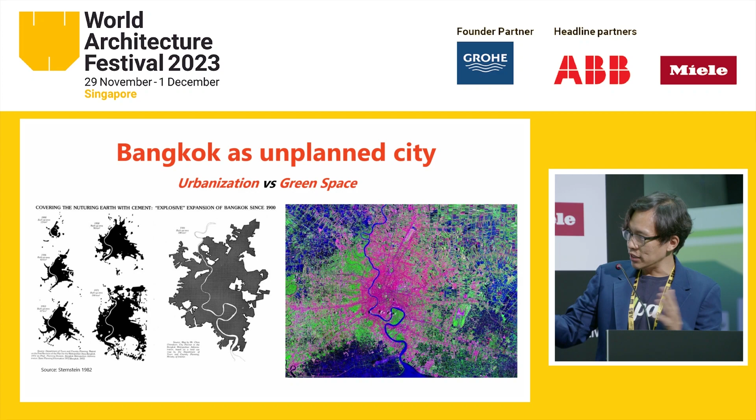Bangkok is one of the cities facing that problem, because the more the city grows, the more green space gets diminished. You can see that the city is unplanned and keeps growing.

This is becoming a city challenge in order to find land, and we are quite lacking in terms of the resources needed to implement parks.

But of course, we don't want the park to just be about putting in trees. We want quality parks as well, and they need to be accessible within walking distance.

What we found out is that even though the city is well developed, there's still a lot of abandoned area left in the city.

There are so many different typologies, from under the expressway, along the canal, along the footpath, or even along the railway.

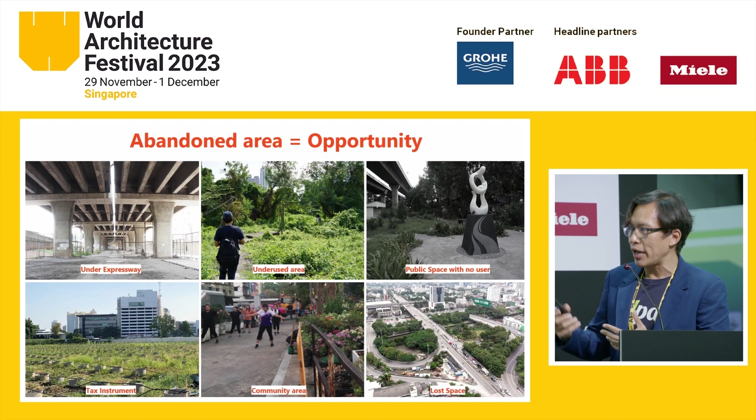This is a city opportunity to use this abandoned area to turn the grey, unplanned city into a more sustainable and greener city. Our approach is about small intervention creating bigger impact.

After working in Thailand for so many years, we realized that developing big interventions requires a lot of big investment and coordination with multi-stakeholders, which takes time to develop, and we can't wait because the problem is so big nowadays.

This approach requires four characteristics. Firstly, it's about infiltration, because it can be easily accessed within walking distance among communities, and the communities themselves can customize the program for each abandoned area.

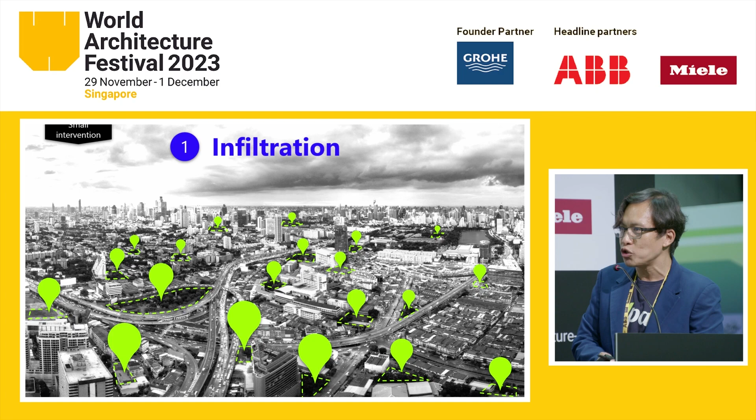Second, it's easier and quicker to implement compared to bigger interventions. Third, since it's less complicated, it can be scalable. Lastly, to create much bigger impact, it needs to be linked as one system and work together. So we established this platform called We!Park.

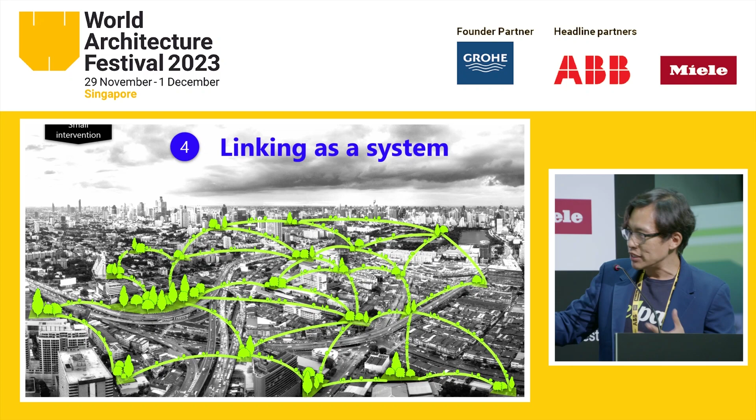It's a platform that connects stakeholders and resources in order to transform abandoned areas in the city into green infrastructure and parks within walking distance.

There are two important strategies in what we did. The first is about connecting multi-stakeholders, and each one of them has resources, whether it's land, funding, know-how, or even volunteers.

Everyone can co-invest in transforming this. I think this is the opportunity if we can bring all the resources together.

In order to do that, we need to empower people with simple tools, starting from an application that lets everyone easily identify available land in their neighborhood. We have data to analyze which land is more of a priority to develop further.

We have a guidebook to empower basic know-how for doing the park, and of course capacity building across various stakeholders, from the youth to city governments, to the private sector, and to the community.

We designed the process to make sure all stakeholders have a certain role throughout, from finding the land, to co-designing the program and the place, to co-investing.

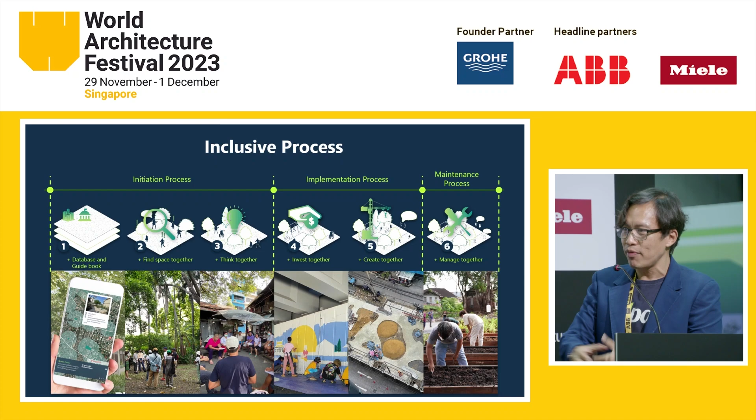That includes crowdfunding and co-management after the project is completed. As I mentioned earlier, we can't just put trees in an abandoned area—it needs to be green infrastructure too.

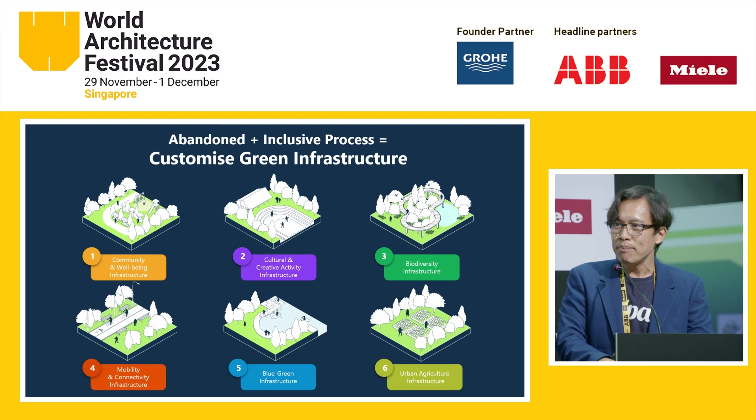It can focus on the community, or be blue-green infrastructure to mitigate flooding, or increase urban biodiversity, improve connectivity in the urban area, or even become an urban farm for the community.

We started with 5 pilot projects in the first year, and after 3 years we've been able to scale up to 24 of them this year.

Next year, by working closely with local government, we would be able to expand to another 100 more. I would like to show you some of the projects we already finished.

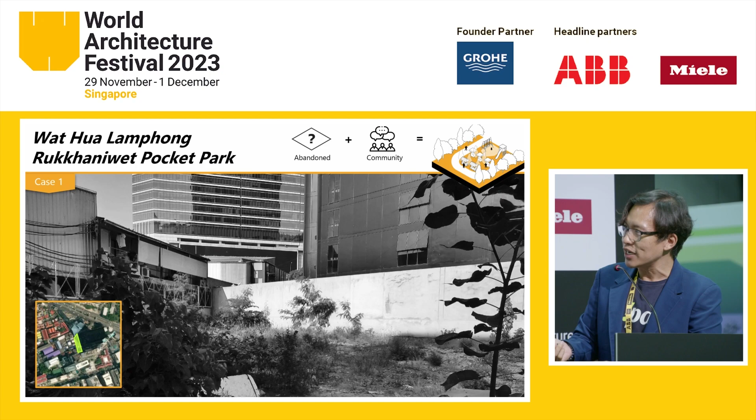The first one is a small plot of land within the city center, and we used this process to organize and engage students and the community.

We came up with a pop-up park and did crowdsourcing and crowdfunding together with government funding, and were able to complete the first pocket park using this platform.

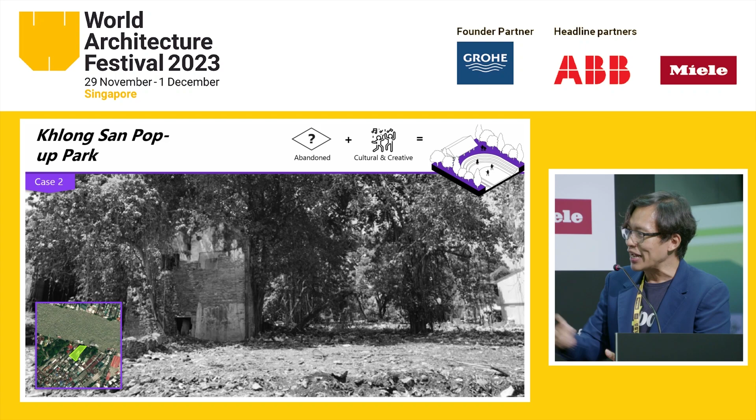It's proven that it can combine with many functions in the area, from the youth function, multi-spaces and playground. The second one is right next to the river, within the cultural community. And as you can see, that is full of garbage.

So what we did is ask all the stakeholders and community to clean up the land. Then we slowly used pop-up parks as a strategy to show the possibilities of how the abandoned land can be developed, progressively, phase by phase. So the community can start to use the abandoned land right away. We don't need to wait for the city budget.

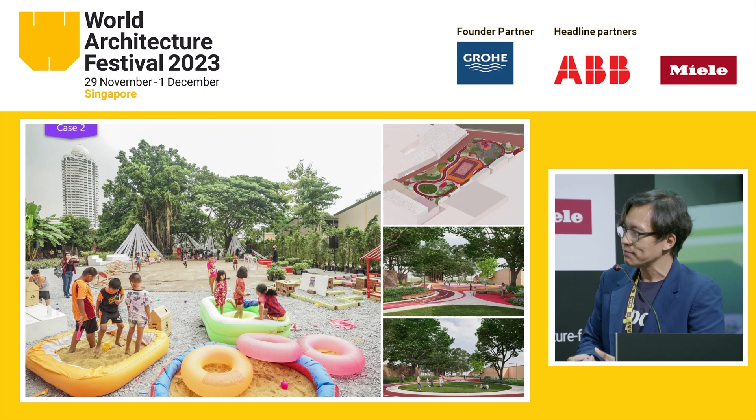The third one is more about biodiversity, because they have a lot of existing trees. What we did is organize youth activities to collect data about the ecology found in the area. We further developed that data with the community as a park focusing on preservation and biodiversity.

Another type is about improving connectivity along the canal. We have this kind of typical place where people don't want to walk because it's unsafe along the canal. So we organized a workshop connecting young designers to come up with pop-up parks along the canal.

So people feel safe and want to walk from one point to another. It becomes like a permanent structure in some locations, making it more vibrant, and people in the community can utilize the place.

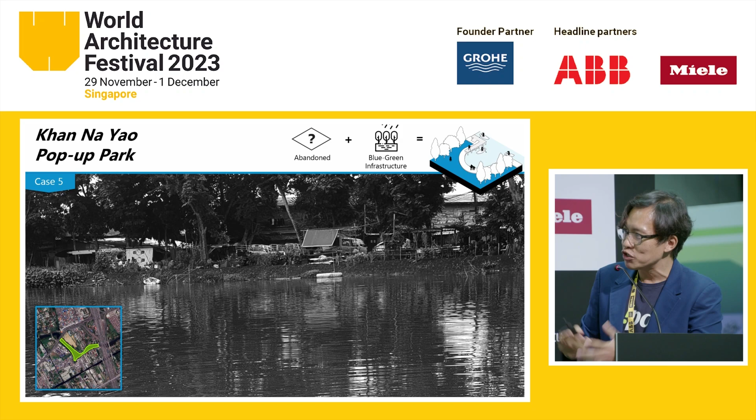Another type is about places that connect people back to the canal, because we have a lot of canals in Bangkok, but we never use them. So with this park, we've opened up the possibility to show the community that they can utilize the park for recreation, and also generate more economic value for the community.

Another type focuses on the urban farm, where we connect expertise to teach the community how they can utilize it for an eatable garden.

To conclude, all along we believed that making a park is the authorities' job and responsibility. But by opening up this kind of platform, we've opened up many models showing that abandoned land can become a park and green infrastructure in many ways, by combining private sector funding, progressive development, or even business models to make sure the park can be more sustained in the future.

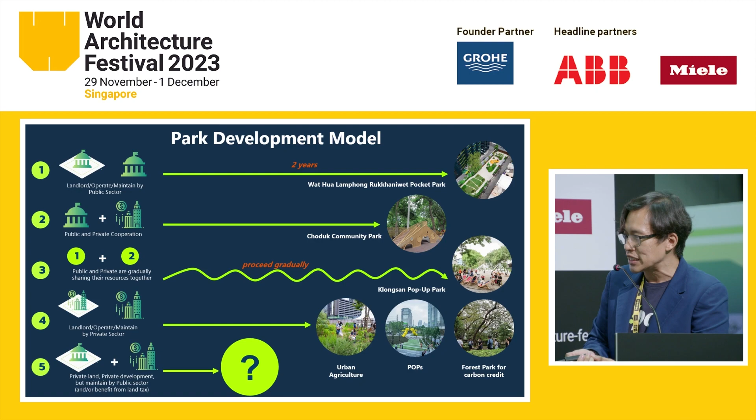And of course, it has unlocked city potential by turning abandoned land into parks in various locations and many possibilities.

What we try to do is decentralization, because all along we believed that resources and ability are all up to the government. But by decentralizing the know-how and the data, I think everyone can be part of this process and be the driving force in developing the park.

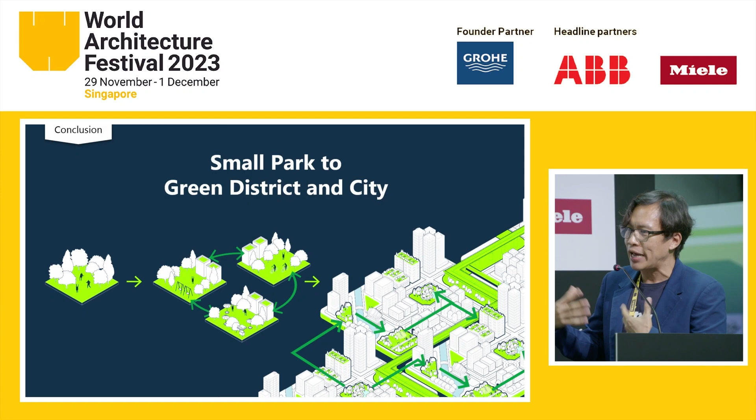From one small intervention in the community, we can connect and scale it. So we can slowly turn the gray city or unplanned city into a greener one in the near future.

I think the key is empowering people to be part of this process, to empower the city, because without the people, we cannot do it. We believe we all have the resources, the ability, and the power to do so. So this is what we did as WePark.

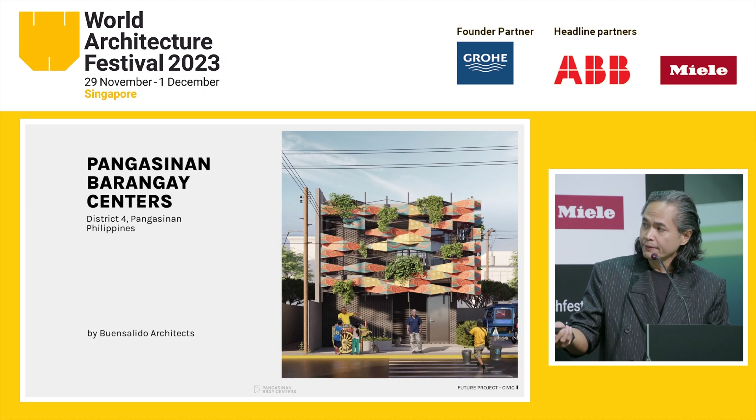We're about 30 in the firm, but I begin by saying that this project is a product of not two, not 30, but 607 creatives. And to better understand the scale of this collaboration, we start with this word right here: barangay.

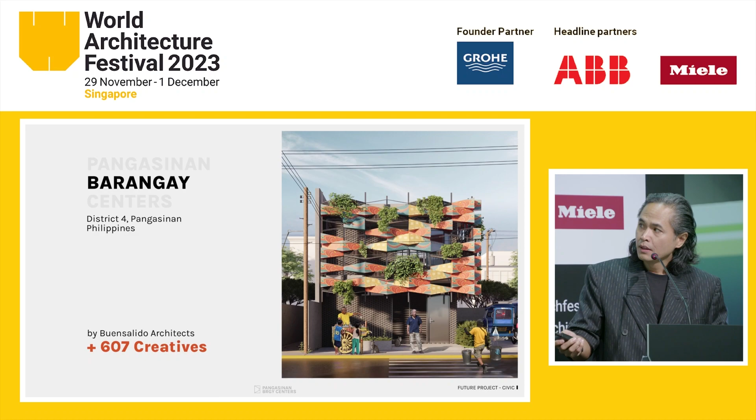Comparable to a village, the barangay is the smallest political unit in the Philippines and serves as the fundamental base of our national government. Today, there are more than 42,000 barangays in our 7,600 islands, each with its own elected officials and functions, a decentralized system that works because of the country's geography.

Pangasinan is a province four hours north of Metro Manila, and its 4th district consists of five municipalities, sharing between them 140 barangays.

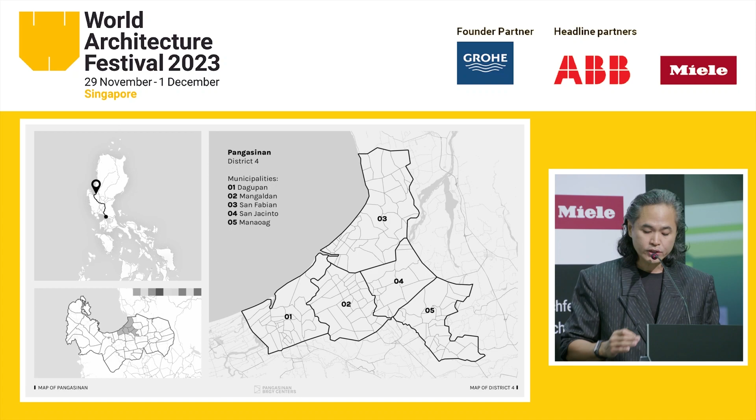The brief was for us to standardize all 140 barangay centers, which usually come as 2 or 3 stories or else as a multipurpose court, whose main function is to be the core facility where government services are delivered to the immediate community, from food and health to other essential needs.

Its promise is to be a bridge between the government and the people, uplifting lives through dignified social services, empowering people to participate in the decision-making process, and engaging the community through a social space that they can identify with.

But despite the intent to decentralize power, a centralized authority is still felt with the current design of barangay centers, with the national government prioritizing speed, control, and cost, sacrificing the quality of these spaces. Centers are designed to be purely transactional, often devoid of identity, culture, and even basic human comfort. The result is that people are alienated from these structures.

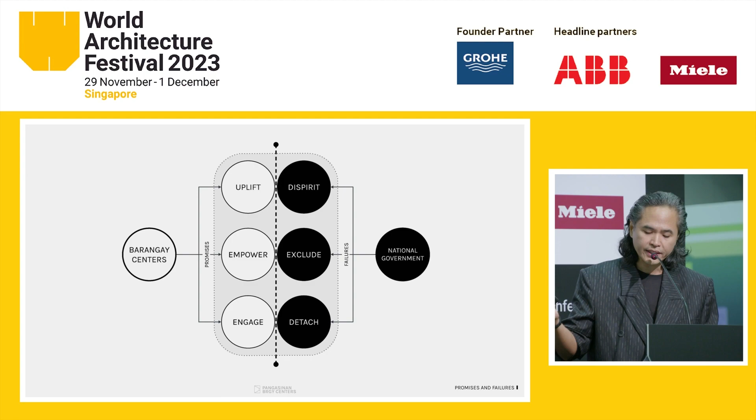They are dispirited because of the quality of these centers. They feel excluded as their centers fail to reflect the local context, and citizens are detached, unable to create shared memories and meanings about the place due to the lack of social spaces.

Now, Pangasinan's congressman recognized these failures and challenged us to find a way to standardize the design while still maintaining the character of each and every location.

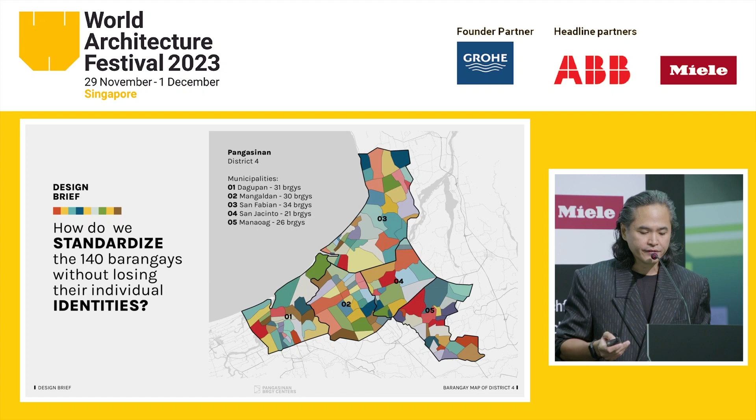There was a catch, however. We were asked not to change the plans as these were already pre-approved by multiple authorities. And we were also asked to continue using low-tech conventional construction techniques to secure cost and buildability.

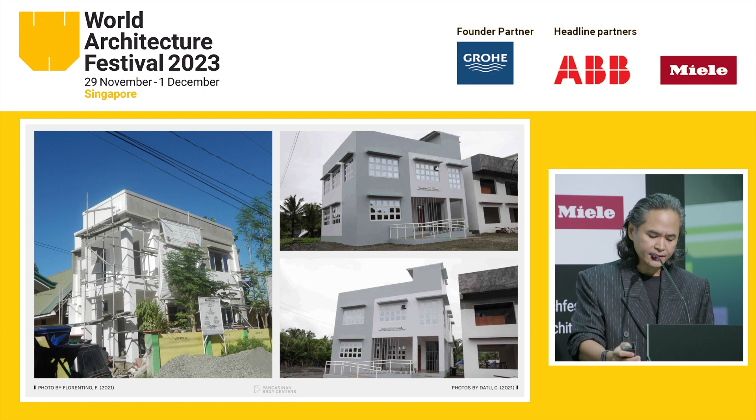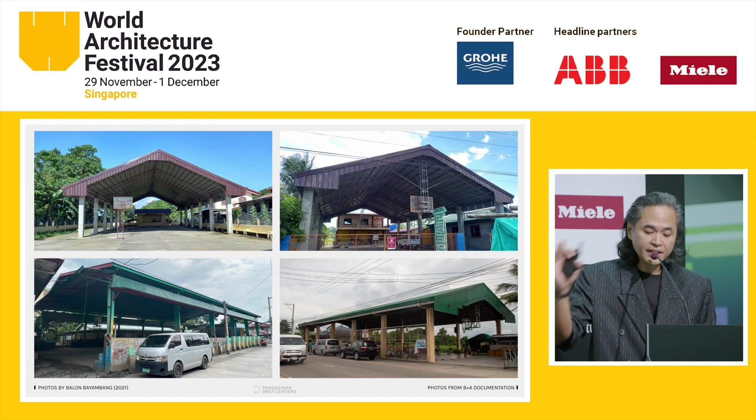They also asked us to focus on the exterior as a small first step to attract citizens towards the centers beyond mere transactions, and as part of a larger and more drastic improvement to the design over the coming years—all while working within the same budget allocated for the current design.

So as we reflected on these challenges, we came to realize that these buildings are just like the people they serve. People have common values, yet we keep our own individual identities intact. And like people, buildings also have bones, a body, and a skin.

Bones provide support like a building's structural frame. The body is our exterior shell like the walls, while the skin, along with our clothing, provides our outermost identity and protects us from the elements like a building's outer screen.

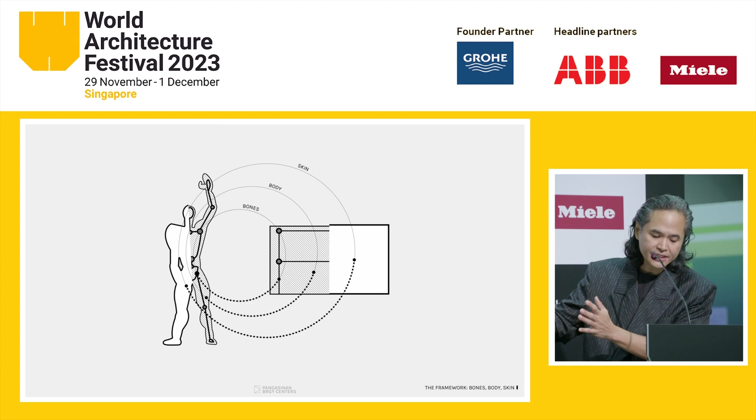This framing of the problem helped us determine that while the bones and the body could be optimized for standardization, the skin could be reimagined for localization.

So starting with the standardization, we decided to retain the post and lintel construction for the bones, but optimize the heights and roof slopes to lower the costs.

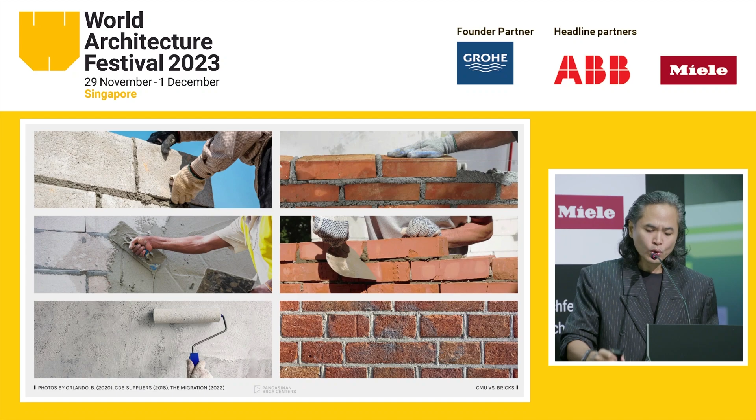For the body, CMUs are still the standard in the country despite its inefficiencies. So while we were asked not to touch the body, we still shifted the material to brick, as brick is just as low-tech, but is more sustainable with thermal insulation that fits our climate better.

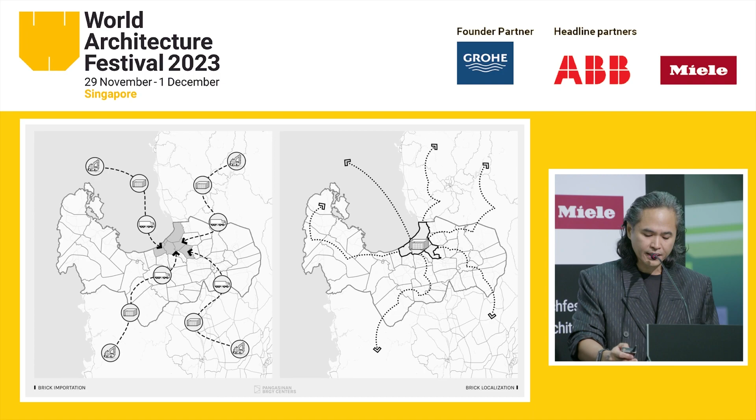Part of our proposal is to actually revive the local brick industry, not only to cut importation, but to also supply other projects in Pangasinan. Design-wise, its curved undulating form alludes to the ocean surrounding this coastal district.

Now, having established standardization through the bones and the body, we shift our focus to the skin next as we localize the building's character to respond to and reflect its eventual context.

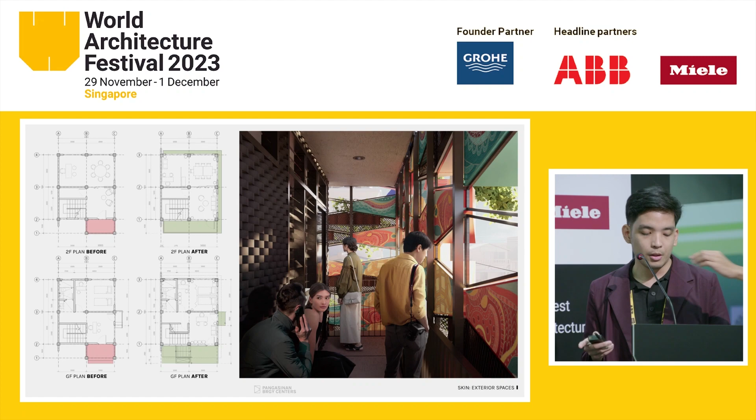So as a first step to localize the skin, we added features towards better thermal comfort, since the previous design lacked responsiveness to the tropical climate. We introduced canopies for shading and widened them to create wraparound balconies as social spaces. This resulted in a larger and more usable welcome porch underneath.

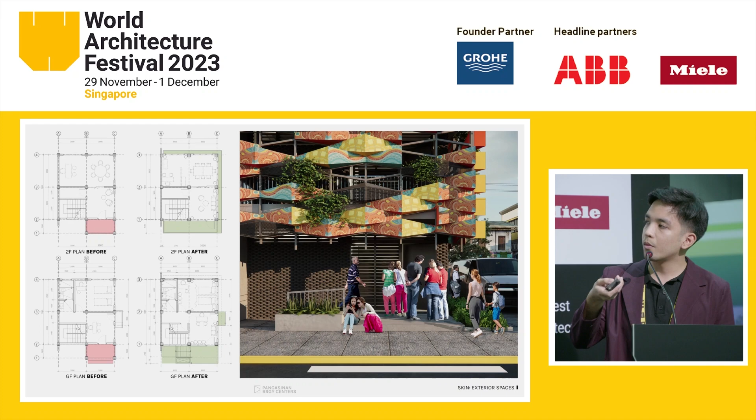We also converted the openings to jalousies to let in as much air as possible. The windows and doors were all made into modules to improve costs and speed of fabrication. The skin is then introduced around the balconies as a brise-soleil, which further protects the interiors from the harsh sun, regardless of the orientation of the site where it would be built.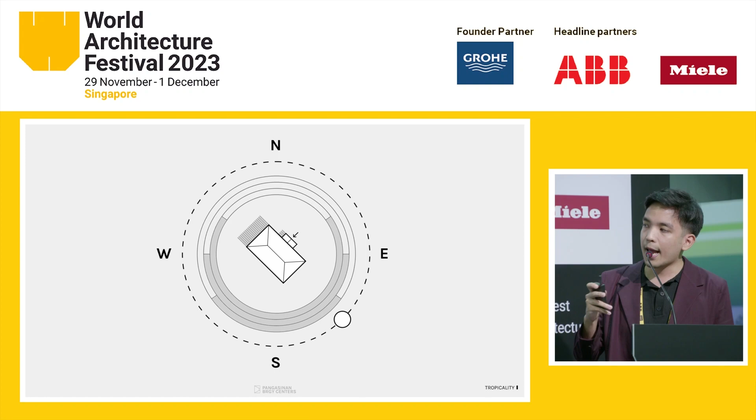So this lack of a specific site presents another concern: how will the standard skin reflect the character of each barangay? And for that, we turn to the bigger picture of Pangasinan.

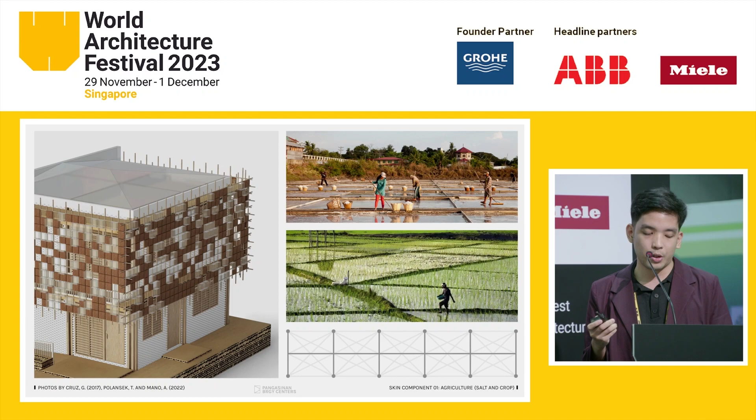Pangasinan is known for various industries where we tried to draw inspiration from. They have a rich agriculture industry where we studied crop arrangements, a traditional weaving industry where we studied the patterns and even their techniques. Combining the logic from all those, we were able to derive this diamond net-like grid, which is a nod to their massive fishing industry born from having the longest coastline in the country.

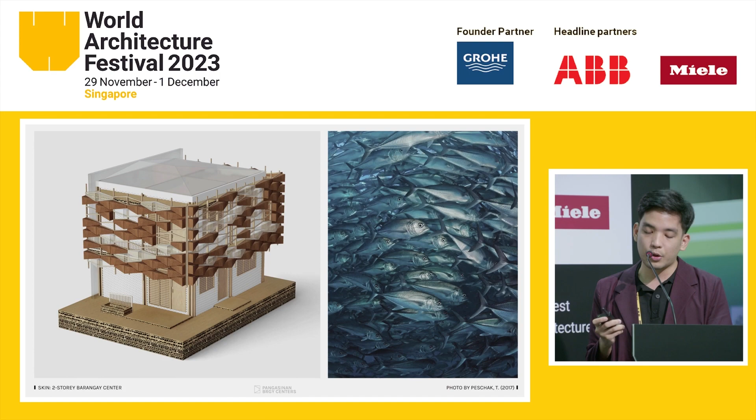We developed this into a 3D network of modular panels that resembles a school of fish, an observation quickly made by the locals. Now, as you may notice, the facade is part solid to block heat and part porous for daylighting.

On the solid part, we borrowed from the patterns of the local weaving industry, discovering a 30-20-10 tonality ratio across the patterns, which we applied to the shading of the panels. We then combined this with the symbolic colors of each municipality to establish both distinction and familiarity.

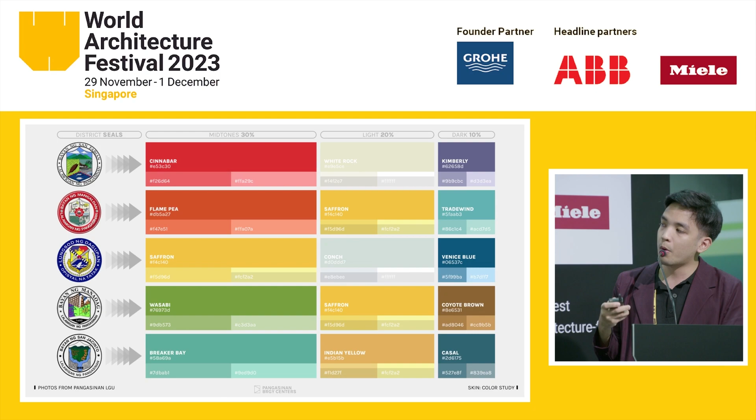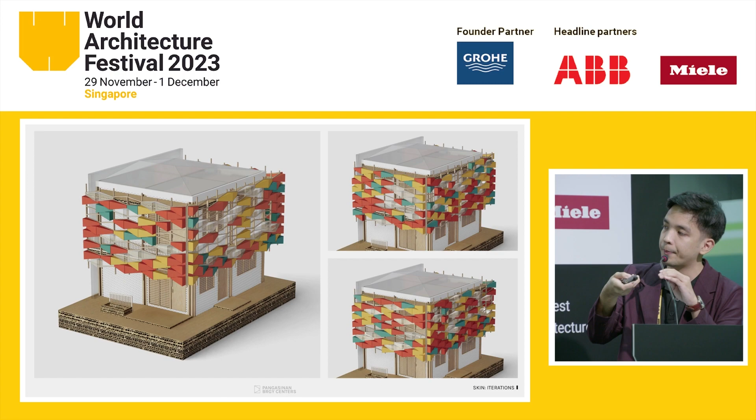To further reinforce this distinction, the skin is envisioned to be arranged differently per barangay. With a parametric approach and consideration for daylighting, we developed hundreds of unique arrangements for each barangay and structure, akin to how our faces, colors, and clothes make us all unique.

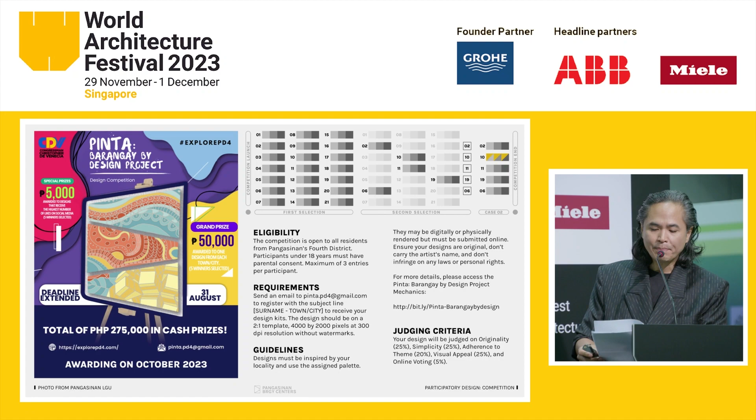The design of the panels will be crowdsourced through local art competitions, where the top 3 patterns will be awarded: one for the light, one for the mid, and one for the dark panels. The competition was launched last August, and here are some of the entries.

Here are some of our own internal pattern studies, which we used to visualize the barangay centers in Mangaldan, Dagupan, and Manaoag, with the skins donning their specific municipality colors.

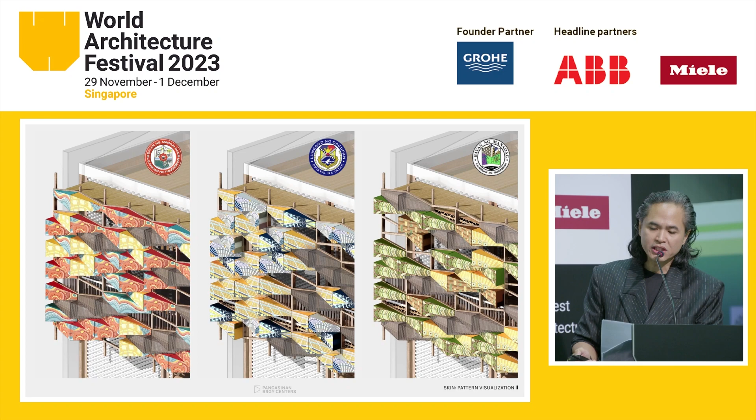We simulated the participatory process by creating a physical model. As mentioned, the panels are modular, fabricated off-site, and shipped to the community, where the residents of the barangay themselves can volunteer to help paint the winning patterns on the panels.

The result is a building that is inspired by, designed by, and crafted by the local community, which hopefully creates a high sense of care and ownership towards these barangay centers.

The vision is that each barangay, with their own communities, can independently implement this standardized design on their own, without even needing us, the initial designers.

This, unfortunately, opens up the project to issues of quality. For that reason, we authored a design manual that covers everything a barangay would need to deliver the project, from concepts to Gantt charts, a detailed kit of standardized parts, among other things. It's a living document that can be improved over time. Some barangays have actually started constructing their own centers independently using the standardized manual.

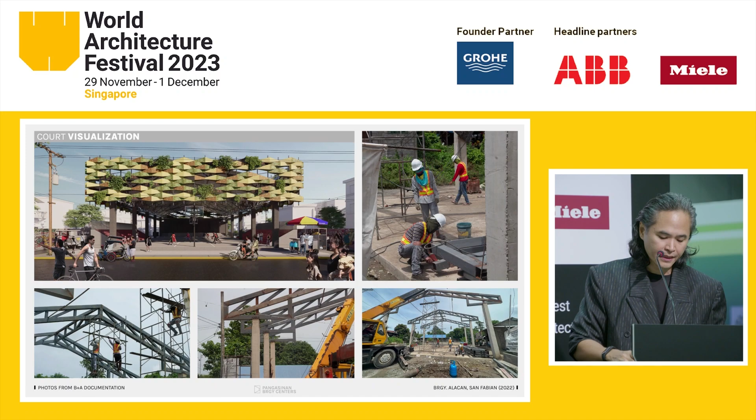This is the multipurpose court in San Fabian and the 2-story center in Mangaldan. We're very excited to see about 20 completed buildings by the end of the year, and 20 more every year after.

So to close, our aim was to balance standardization with localization. The standardized bones and body address buildability, cost, and speed of delivery, while the localized skin solves tropicality and identity.

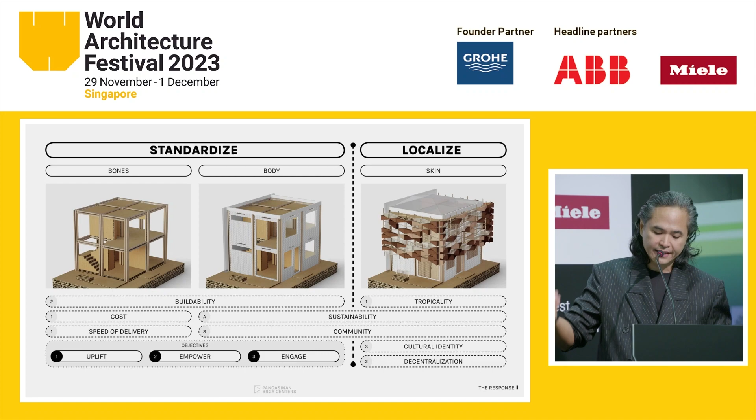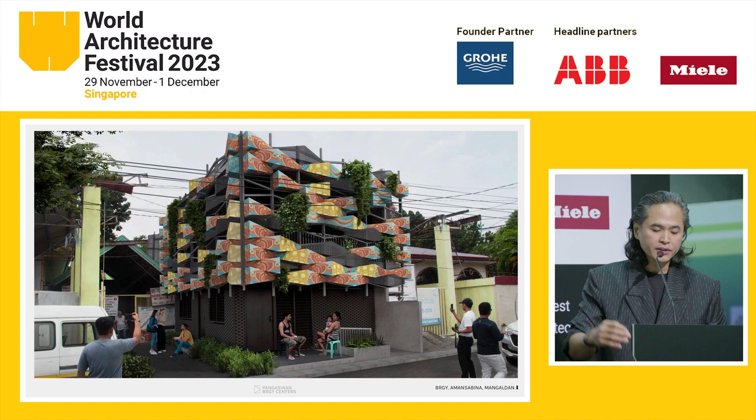The hope is that what was formerly a mere transactional experience be transformed into a social space that encourages meaningful connections, resulting in an uplifting, dignified experience.

By conceiving spaces that can be influenced by, designed by, and even crafted by the people, we create an empowered community, reviving engagement towards barangay centers as people start to see them as a reflection of their collective visions and values. We're very optimistic that the project, no matter how small, can cause a ripple effect towards a more engaged citizenry, especially if applied successfully to all 140 barangays, or even across 42,000.

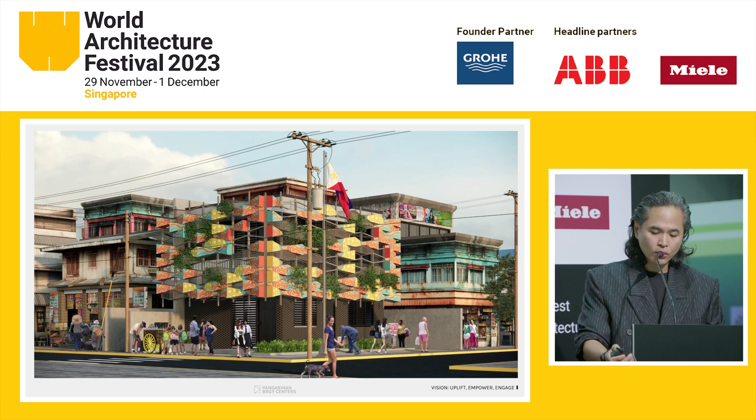Hi, sorry, do you hear me? Yes. I really feel very privileged to be amongst these projects.

Today, although we usually focus on public space, I am going to present a project that is not about public space, but how to activate third cities, with a prototype in the US in a small town.

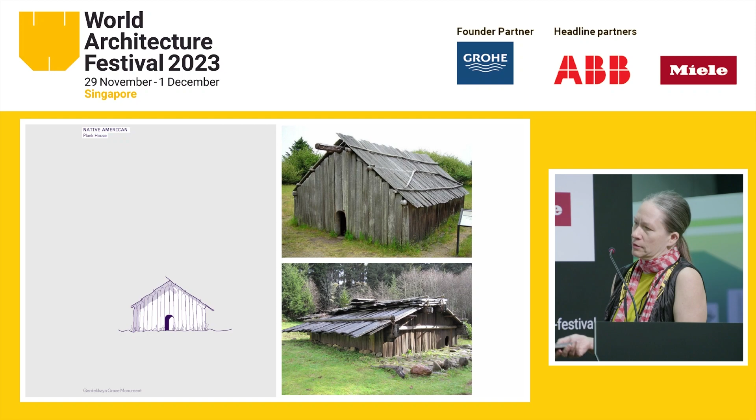So rich that the land has been settled over thousands of years. It had a very rich Native American culture, who in this particular part of the Willamette Valley built longhouses. About 200 or 300 years ago, many settlers came to farm this very lush land, and with it they also brought their own built culture, with silos and barns and their own expression.

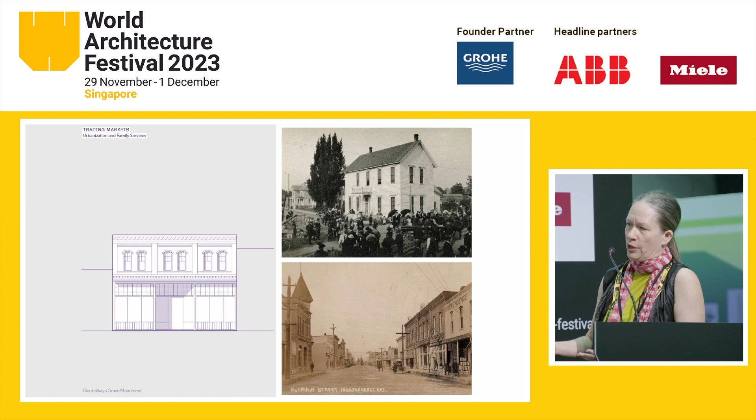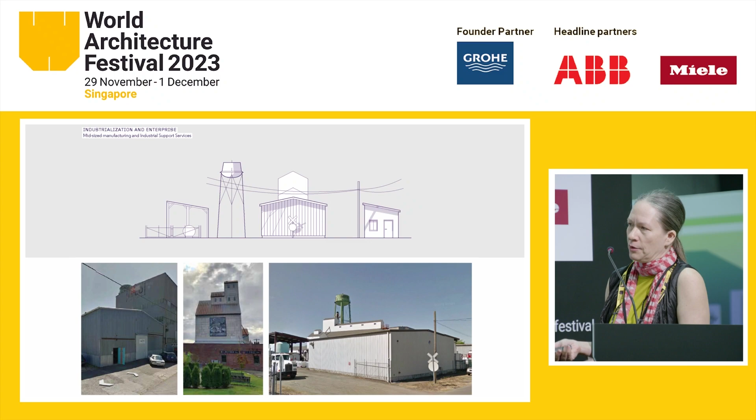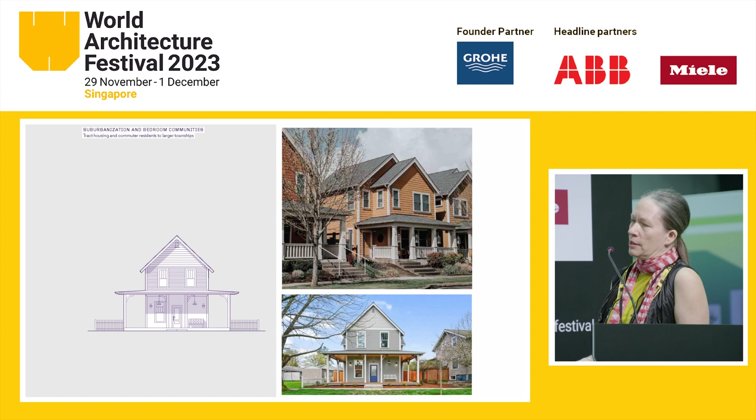With that came wealth and an architectural expression mimicking the Victorian, called the gingerbread style, but in a more rural context. This was followed by another phase of economic development—mid-sized manufacturing that took advantage of entrenched agriculture but advanced into industrialized practices with electricity and other things, which put in place hospital infrastructure and universities.

Modernization resulted in what we're all familiar with: the suburban home, the single-family residence, which is growing and growing. What we found is that the single-family residence, because of its land greed, actually diluted public life and economic access—a prolific problem many countries face, not just affordable housing, but accession for new generations.

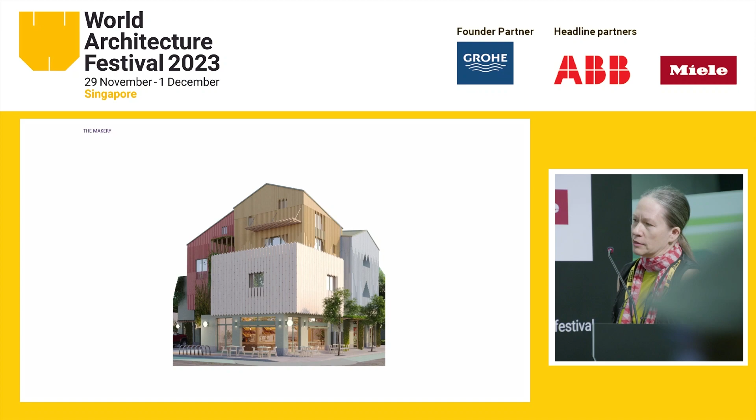So our idea was to build on this dream, over many generations, of access to micro enterprise or self-determination to open shops alongside the single-family residence. We came up with this concept of the makery, built on a model thousands of years old: the shop at the bottom and living above.

We call this a foundation to stand on, and it introduces a new economic model. One of the problems with the single-family residence is that because of modernized zoning, most residential land becomes inaccessible to business, and this creates a fragmentation of families who have to work remotely.

Somebody will be a nurse, somebody an educator, somebody will work at the shop, and the kids have to get to school. All of this across most of the US uses a very similar 80-foot by 60-foot parcel. So we asked: if we took these important elements apart and combined them into the same parcel, could we come up with a new economic model?

On the same parcel, if we do this, we can actually get 4 units on the same piece of land as a single-family house. But underpinning this is a kind of loss that many people feel about what that dream is—the dream of accession and wealth creation for the middle class.

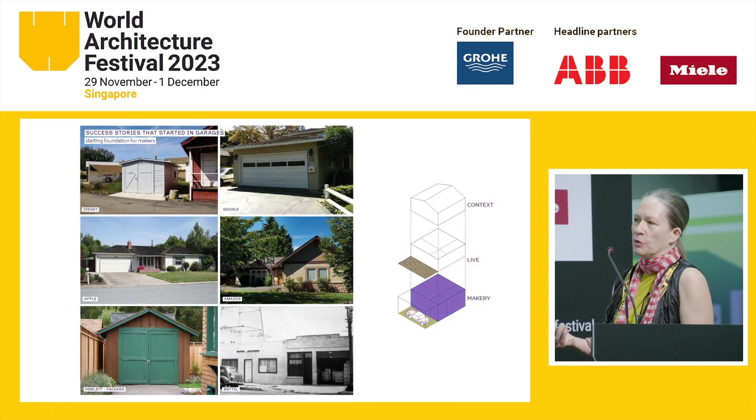One of the things that's really exciting about the American dream is entrepreneurship, and many big corporations actually started in the garage. So we wanted to put the garage at the core of this—hence the idea of the makery.

Many people across these small rural landscapes use these spaces. These are places that exist in rural American small towns, either as second businesses running wellness services, Etsy shops, providing fresh food, or as gyms for hobbies. This is really the loss people feel when they want to leave the single-family residence—the loss of access to this kind of third identity, self-interest enterprise.

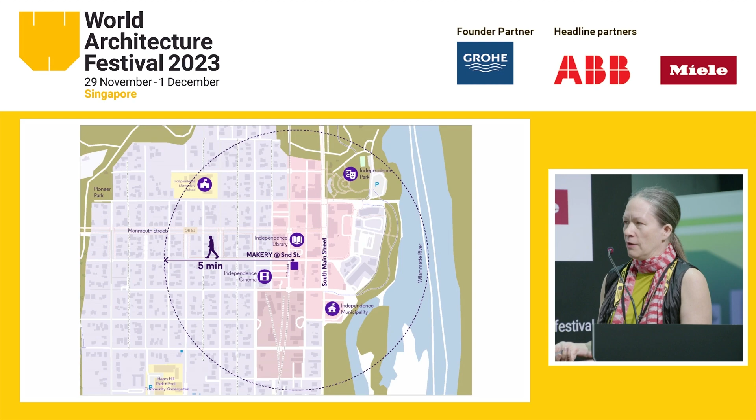So how can we bring this back into the infrastructure? We've been choosing sites within a 5-minute walk of this historic infrastructure—the main street, the school, some type of recreation, the library, the cinema—choosing sites of this 60-foot by 80-foot module. We call it the makery.

How do we cultivate it? One of the main things is that a lot of these sites have a historic heritage we have to assimilate within, even though we're changing and proposing new density. Many of them have interesting ground regulations, so we're trying to uplift that, giving them high floor-to-floors at the ground level that spill out and borrow the sidewalk as public space.

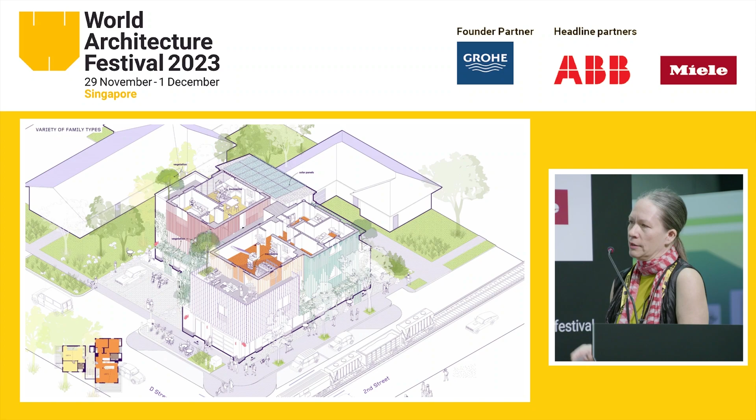But we still keep very high-quality standards of living, since a lot of people who live in rural communities feel they have a lot of space—so 3-bedroom units, 2-bedroom units. These are places people want to grow families in; they don't want to downsize. As well as access to nature, so you get above to see the views, and sustainability.

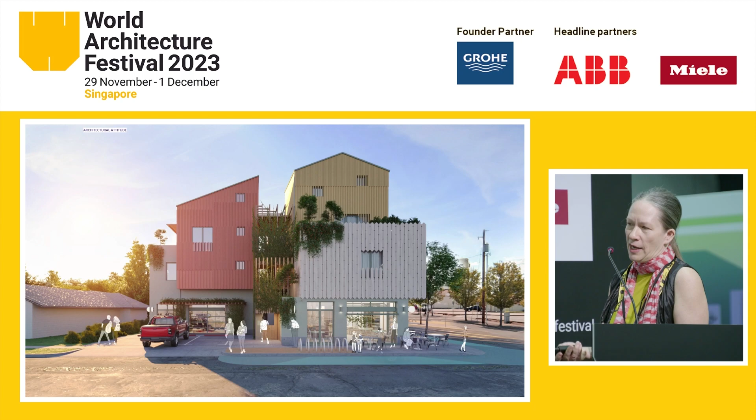When we put these together, we also feel that people still want that sense of identity, so each tower has its own identity, like the single-family house. We source most of the materials from the forestry around us—the whole Cascade Forest surrounds us. So how do we upcycle the barn wood? How can we use mass timber coming out of the Cascades? How can we build on the handcraft that built the identity of this area's gingerbread housing?

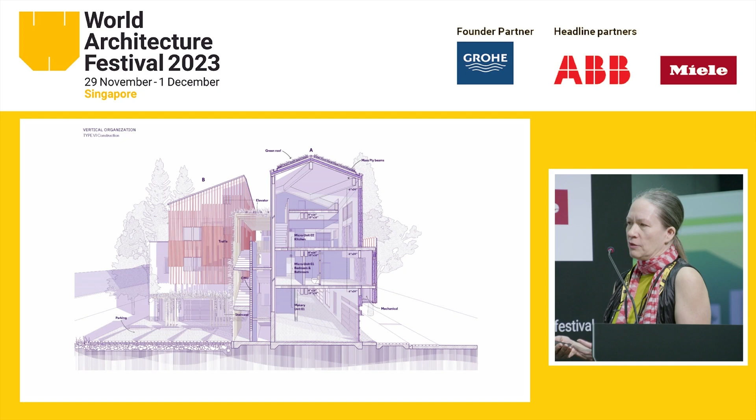And how do we make this a net zero project, right? One of the big problems with the single family house is the cost of living and the cost of operating, and the cost of having a second car.

So we've really worked hard to design the envelope to have a low energy consumption, and studied how we could do this so that your operating cost is quite low, but still have a very high quality of life, meaning really nice fine finishes, really nice large kitchens, and access to views beyond.

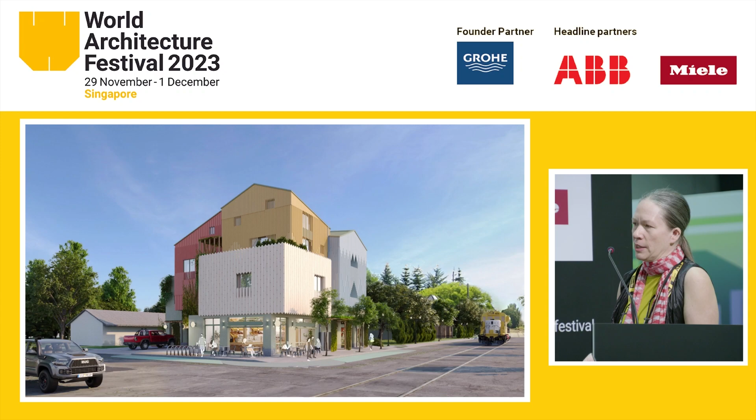We also, because we're in rural areas, we do still have trains moving through. We have large cars. This is not an urban setting by any means. In that sense of trying to encourage people to move from their single-family house, we're offering common spaces so people can still have large Thanksgiving dinners, still have kids' parties, by having a shared kitchen and a larger space for dining of like 14 people.

One of the other things was bringing back this gingerbread language that's quite important to the identity, as well as some of the finer crafting of the wood. So this was a big part of working with the community to feel that it had a sense of belonging.

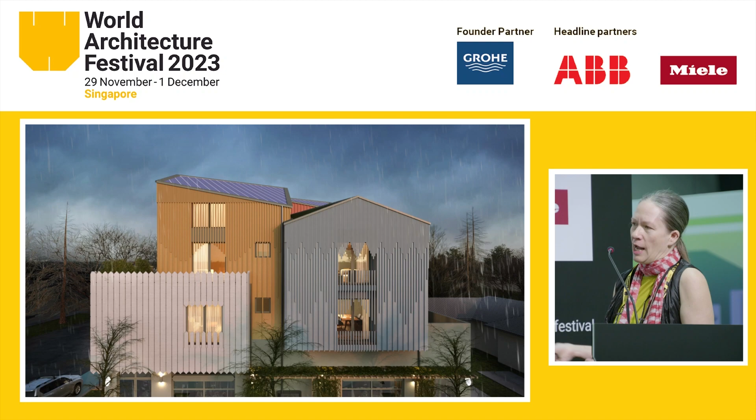And the big picture idea is that if you took 30 different parcels that are available in many of these areas, you can see the amount of land that's actually available. These are all the 60 by 80 foot parcels. We could actually create the same critical mass of larger mixed use residential housing, getting 120 families and many, many job opportunities, all within walking distance, and building nothing on the current infrastructure nor using greenfield.

So this is our idea. We call it the Makery. We do try to brand it so that it can be replicable in many of the small towns across the U.S. So thank you.

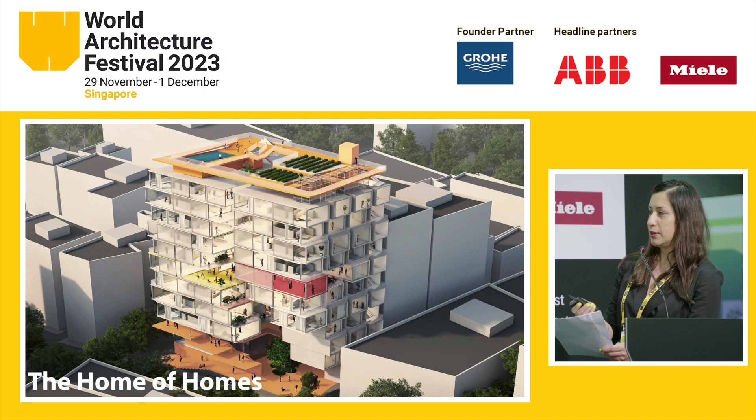The observation that our world is becoming more divisive and polarized is a concern that has been widely discussed and recognized. Divisive issues such as politics, religion, and social values often evoke strong emotions and lead to polarization. When people identify strongly with certain beliefs, they may be less open to understanding alternative viewpoints.

Social interaction creates the possibility of interaction between individuals from different backgrounds, exposing them to diverse cultural norms and values. Individuals start to share their experiences, perspectives, and emotions. A feeling of listening and being listened to starts to grow. Social interaction creates more compassion within the community. Meaningful relationships start to form, leading to a more collaborative community that cares about their environment. Social interaction can connect, rather than disintegrate.

Architecture can indeed play a significant role in shaping and facilitating healthy social interactions. The design of physical spaces can influence human behavior, emotions, and communication patterns. We hope to see that the Home of Homes could facilitate better interaction with a view to creating a better understanding within communities.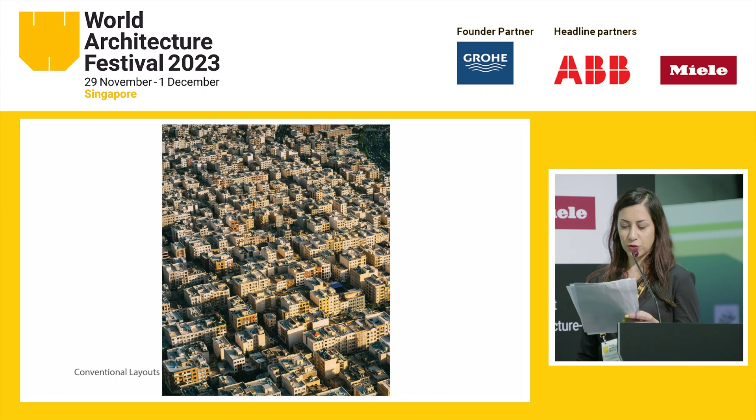We think breaking from the conventional layout could help achieve our goal, a new kind of layout, namely an interaction-enabling layout, creating spaces that prioritize and facilitate social engagement, collaboration, and community building.

In Iran, there has been a solid divide between private and public life, rooted in a millennia-long tradition, which in turn was influenced by the geography and socioeconomic circumstances of the people of this land. Traditional Iranian architecture often includes courtyard houses with private interior spaces shielded from public spaces. This reflects the importance of privacy in our culture.

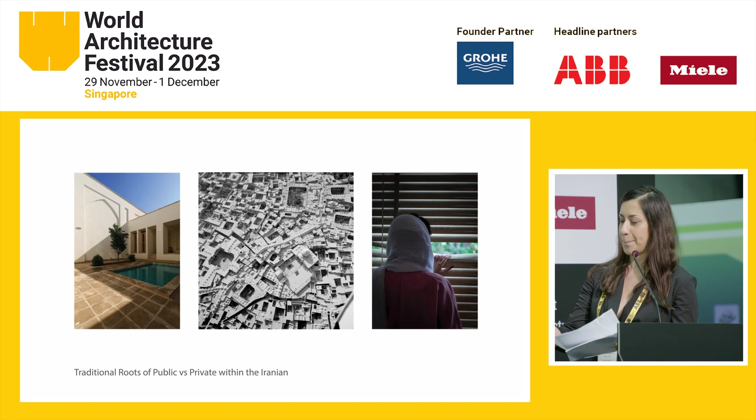Traditionally, people in Iran have had two distinct modes of living and expressing themselves: one that is for inside, like in private gatherings, and one that is for outside, the daily routine in public, with certain codes of behavior dictated by the authorities.

The Home of Homes attempts to question this type of censorship and facilitate a more authentic mode of interaction within the communal areas of the building. What if neighbors could be exposed to each other in a safe, respectful environment? What if they did more together and shared more together?

The concept of this building is rooted in a vision that in a world of isolation and egocentric success, we must seize every opportunity to interact with fellow human beings in meaningful ways. We must seize every opportunity to share and learn from each other. This helps create a community that is more tolerant of differences and more keen to create a better environment.

The Home of Homes is an embodiment of a vision to blur traditional boundaries between the private and public. There is a spectrum ranging from the public to private. On one side of the spectrum, you have the street level that is completely public. On the other side, there is inside the unit, like bedrooms.

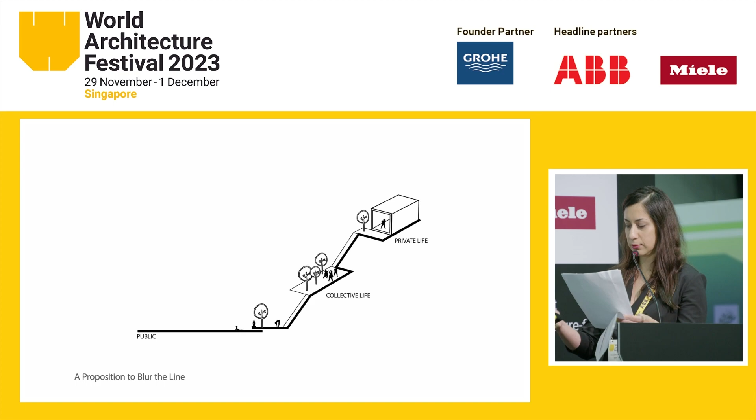The Home of Homes provides a setting that encourages residents to create a community within a community, the inner circle being the users of the building and the outer circle being the urban community as a whole. Throughout the building, the communal areas are designed so they encourage social interaction, promote dialogues between the users, and help create a sense of belonging. There are certain spaces dedicated to social activities among the residents, such as cooking, farming, playing music, working out, and so on. These social interactions would bring the community together and increase the feeling of empathy and happiness.

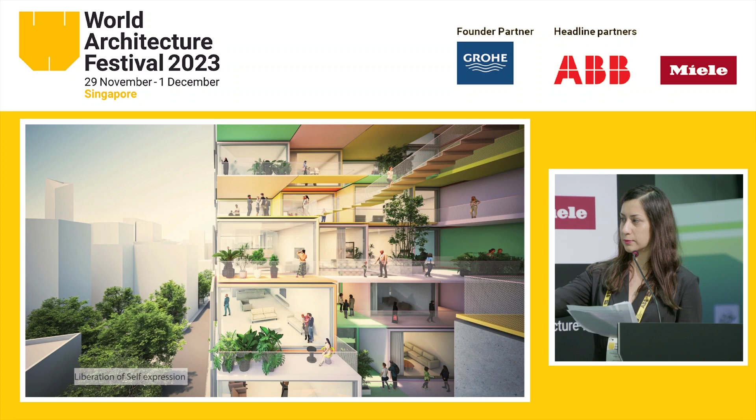Cell, as a part of a larger mass, is a basic unit of this whole cohesive integration, representative of individual with a unique identity. The concept underscored the importance of both individuality and interconnectedness, highlighting the harmonious collaboration and proximity among the components, be it in social, organizational, or broader community context.

Individual can pursue a degree of privacy at each of these cells. The cells are accumulating, stacking up, staggering on top of each other, so they create spaces of social interaction for the users called shared terraces.

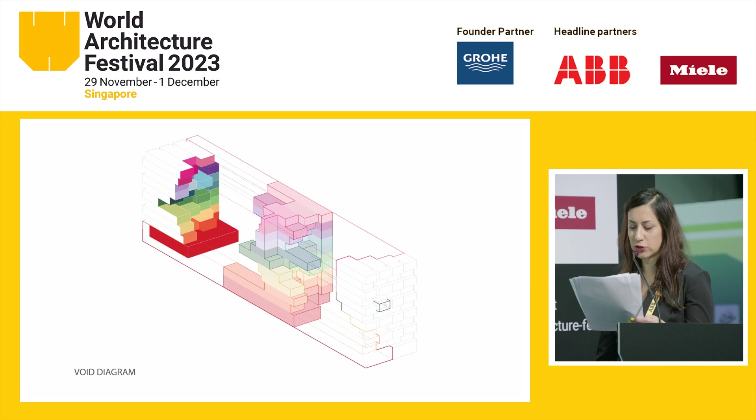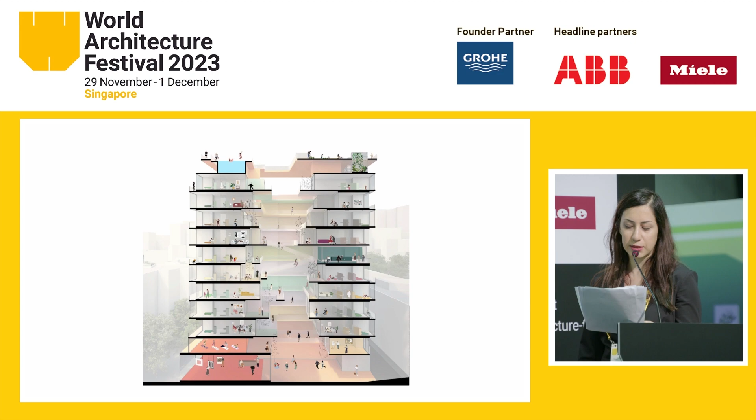Void as an infrastructure intrudes itself into the massing, organized thresholds and breakout areas as a space of interaction throughout the building. The void acts as a vertical courtyard connecting the building to the ground and immediate surrounding, and grows all the way to the top floors and the rooftop and connects back the building to the city on the western side. The void brings daylight to each cell.

There are plenty of shared terraces of various sizes spread out within the internal vertical courtyard of the building. Series of smaller shared terraces created a threshold between the flats on each floor, giving the neighbors the chance to socialize and create a sense of belonging and neighborhood for the residents.

The building houses cafes, co-working spaces, a gallery, entertainment venues on the lower level, which the public has access to. The building also features communal areas such as dining area, a communal room, and a spa residential floor that only residents have access to. On the rooftop, there's more shared spaces, encouraging the residents to do more activities together, such as farming, walking, and hanging out on the sun deck.

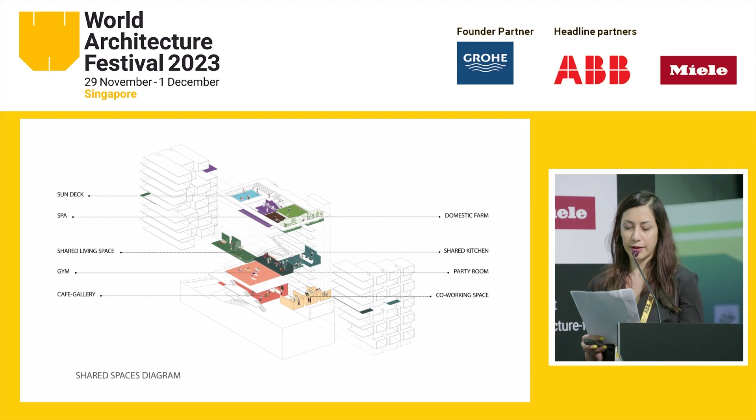Shared facilities have been designed to promote collective living for the intended user, while each flat also provides necessary amenities for a comfortable private life. Users could decide how much they want to spend their time living collectively and how much privately.

Living rooms, which typically serve as more social spaces, are laid out in a way they're looking at each other on each side of the void to foster more interaction. This arrangement creates the possibility of visual connection between the neighbors and the vertical courtyard, and it would bring more closeness and unity within the community.

Bedrooms being at the end of each floor plate and looking outside indicate an emphasis on privacy and connection to the external environment. There is a spectrum from semi-public to semi-private and private spaces on each floor, from shared terraces, living rooms, and bedrooms.

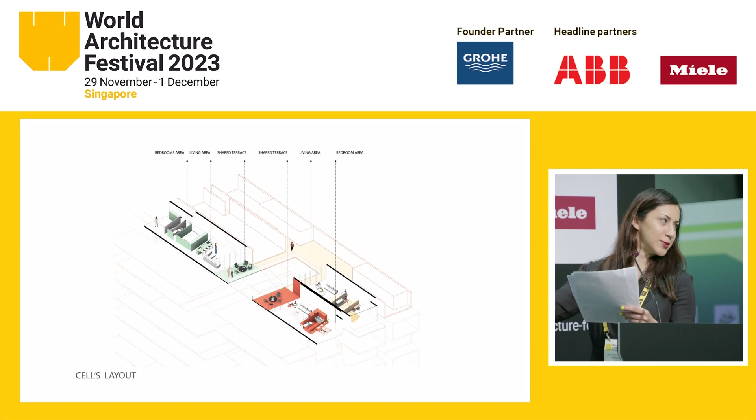This interaction enabling layout creates a balance between social and individual.

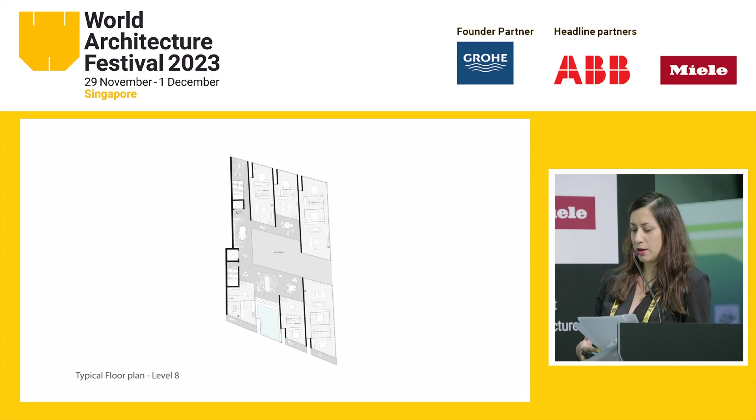The building is opened up at the ground level to be more permeable and for public access, and there are several public uses such as cafe, gathering, co-working spaces. This allows for neighborhood connection and creates more links on the ground level between the residential building and the immediate surrounding.

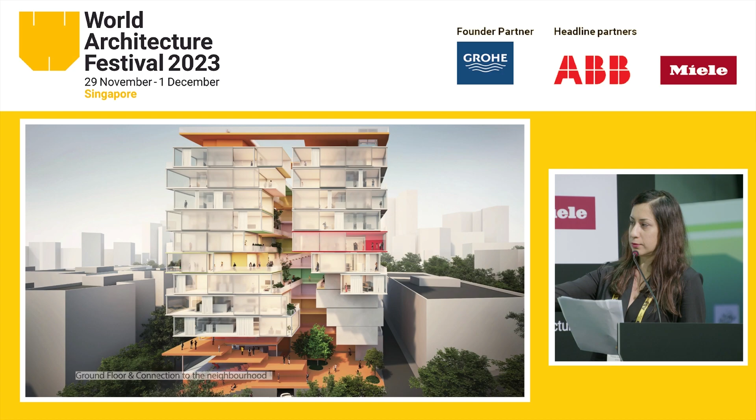So at the end, we hope there is more connection and less disintegration. Thank you.